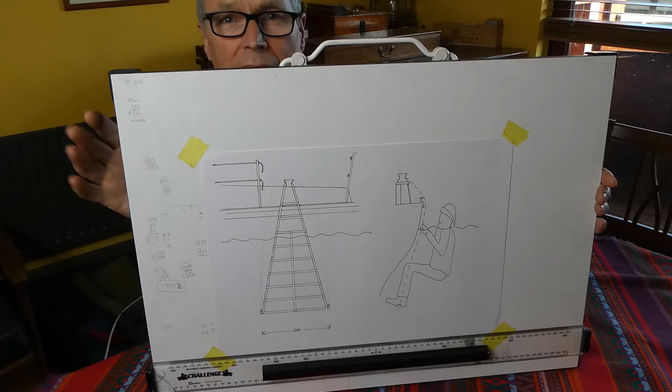So I've been thinking a bit about man overboard, or woman overboard, and decided that a scramble net or a boarding ladder, kind of scramble net, might be a good thing to have on board. I quite often go swimming off Sumara, and my preference is to have the dinghy blown up, so I just climb into the little rubber dinghy, which is easy, and then I just climb out of that on board.

But I can climb onto the boat with a piece of rope looped over the winch. So I put my foot into the loop of the rope, and then I get my other foot up on the deck and kind of clamber out. But of course that's in my swimming gear, not fully laden. And it also doesn't take into account someone who might be kind of drowsy in a life raft, floating horizontally.

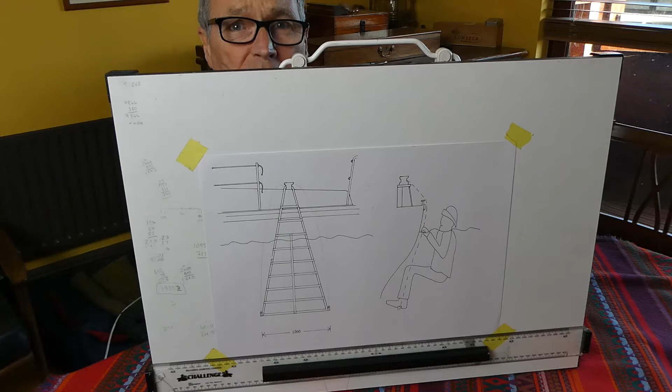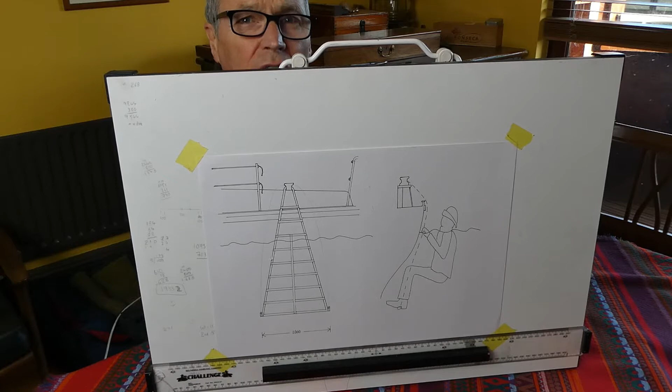So the idea of this is it's kind of a bit of a mixture of a swim ladder and a net that you can parbuckle someone up onto the side of the boat. You can buy some kind of scramble nets, but each boat is different, and Sumara's got a very low freeboard, so it's only about 18 inches, and it would be less than that if someone's kind of hanging off the side and there's a crew there assisting. So probably only talking about getting someone up about a foot of freeboard.

So I've come up with this drawing, and the thing I really like about design and build is because you're the designer, you can just change things. I used to find that when I was building shop window displays for Beales, I'd find a piece of wood that was 4'6", and if it was drawn as 5 foot, hey, I'd just do it 4'6", who cares, you don't have to ask permission.

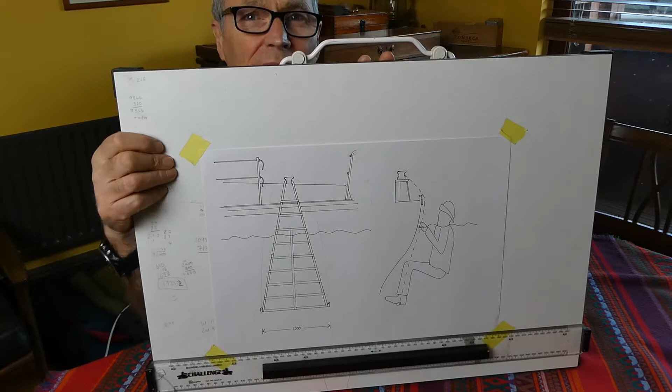And I've done this drawing and looking at it, I'm thinking this width here is quite narrow really. If someone was horizontally in the water, their body might tend to fall out either side. So I'd quite like to increase the width at the top. And I'm also a little bit worried about the width at the bottom being a little bit wide to store, because my boat's very small.

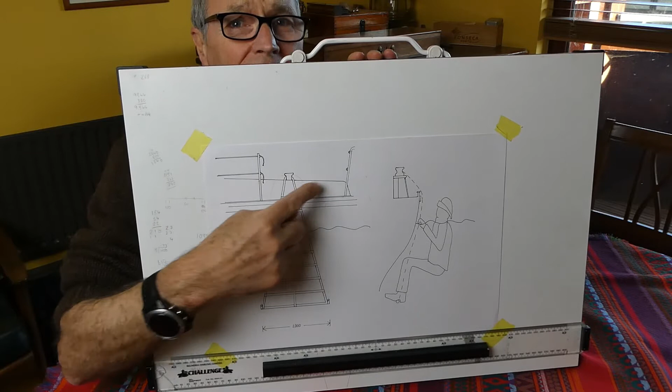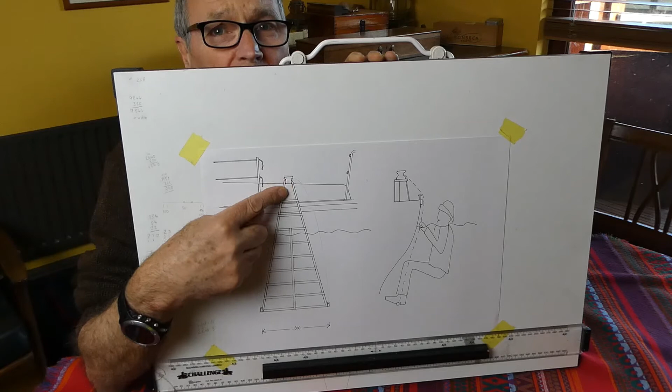So there's going to be a few changes, but the plan is that this is a webbing loop that hooks over the winch. Now the winch is very strong. It's got a stainless steel bracket down to the deck, so even though I'm pulling in the wrong direction of the ropes, there's no chance of that breaking off. So the concept is that you toss the webbing loop over the winch. In the bottom here is a stainless steel pole, which sinks, and it's got on the end 2 fittings that will have a rope loop connected. It will also flop over the back of the winch.

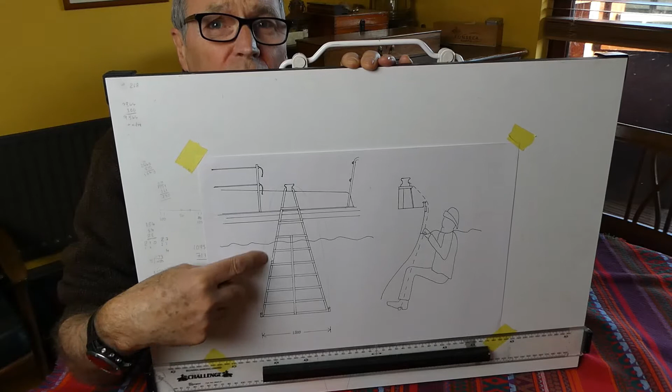Now in between I've chosen webbing, and the webbing going across is going to be hollow, and inside it is going to be a 12mm solid nylon bar. So that will keep this spaced out, and it will be pretty strong and quite soft to stand on. In the middle will be an extra support web going down to stop them bending too much. So the outside web is just a single web going up around over the winch, and these ones going across on the tubes.

So I bought the material, and of course it's good to do these things a fair bit in advance, because you can make mistakes and have surprises. I was a little bit worried about the stainless steel tube; I was going to go for inch thick. In fact, I went for 3/4 inch thick just because I noticed that the company that sells the webbing also sells 3/4 inch thick tubing. So I was going to save a bit of postage.

And the minimum length was 1.5 metres. It's a bit annoying because that adds to the postage, and I only wanted 1 metre. But still, it does now give me the advantage that if I make the bottom slightly smaller, say 800-900, I'll have a little play around soon, I've still got a nice offcut left to go at the top, because one of the worries is if you climb onto the net and put some weight on it, this top part squeezes together.

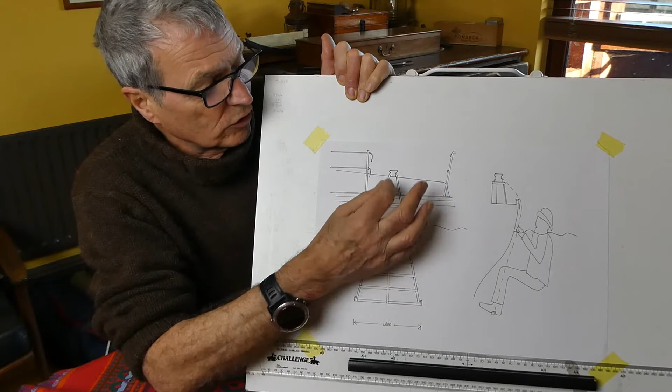So my concept now is that I have a stainless steel tube at the top, a strong tube, which spaces it a bit wider at the top, not completely wide, but a bit wider, say 600mm, and it goes out to say 1,000 at the bottom. So I'm pretty sure this is strong enough. I think it's 16 gauge.

I bought a couple of fittings at the end, so I've got to choose 2 shackles to go in those fittings. So there's a little bit of a gap there to take a shackle, and then I'll splice the rope loop to go over the top. Maybe that should be floating rope, maybe not.

This is the nylon bar. Can't remember what grade of nylon it is, but if it's nylon 6, it'll be phenomenally strong. I've got some kind of rings made of nylon which are used on cod nets, and you can hammer them with a sledgehammer. You can't break the stuff, and it's got a fantastic breaking load. So the idea is that will go inside.

By the way, I got the nylon tube. You can get it from loads of places. I bought it from a company called Metals4U, a bit bizarre because it's not a metal. But all the rest of the stuff I bought from Point North Fabrics, which I think also seems to go under the name of Pro Fabrics. They're very good for all that kind of marine canvas wear stuff, sunbrella type stuff.

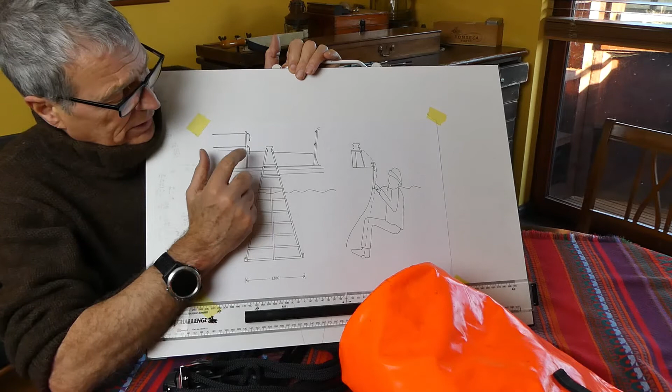These guardrail wires are on pelican hooks, but I've got stoppers on the wires here, so when you release the pelican hooks, the wires don't go slack at the front of the boat, so you don't lose another member of the crew by accident over the front. So it's very quick to release all of that.

Yeah, and it will obviously take a bit of experimenting, working out how long to make this loop of rope. I might on the back of here put a little nylon cod end ring as a quick attachment point to get the big scaff hook in.

But in any case, I'll do some more little shots as I get on with the building, and then when I get up to Scotland, I'll jump in the water and hopefully find an unsuspecting member of the crew walking down the pontoon to have a play with lifting me out. Great.